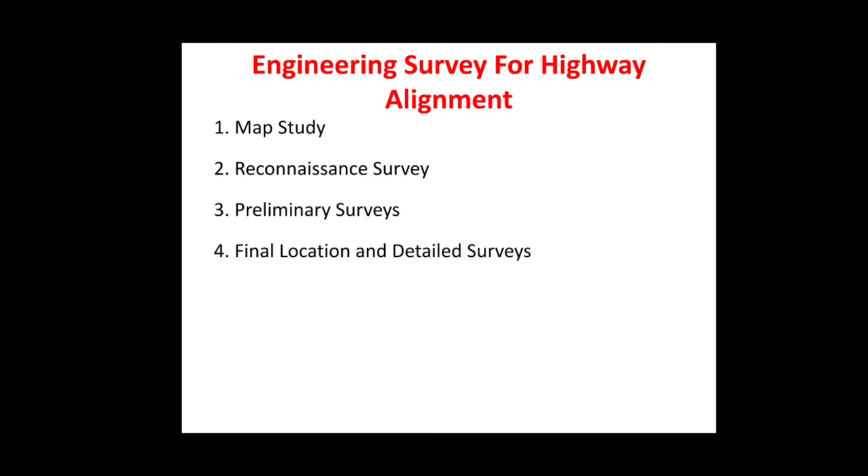In this session, we shall discuss the engineering surveys for the highway alignment. The various sorts of engineering surveys which have to be done for the fixation of the highway alignment are: first, the map study; second, the reconnaissance survey; third, the preliminary surveys; and lastly, the final location and detailed surveys.

Now, to start with the map study. If the topographic map of the area is available, it becomes possible to suggest the likely route for the road. In India, the topographic maps are available from the Survey of India department, and the main features like the river, hill, valleys are shown in these maps.

The careful study of such maps makes it possible to have an idea of the several possible alternate routes so that the further details of these maps can be studied and the probable alignment can be located on the map from the following details available on the map. That is, first, alignment avoiding the valley, ponds or lakes. Second, when the road has to cross a row of hills, possibility of crossing through a mountainous pass.

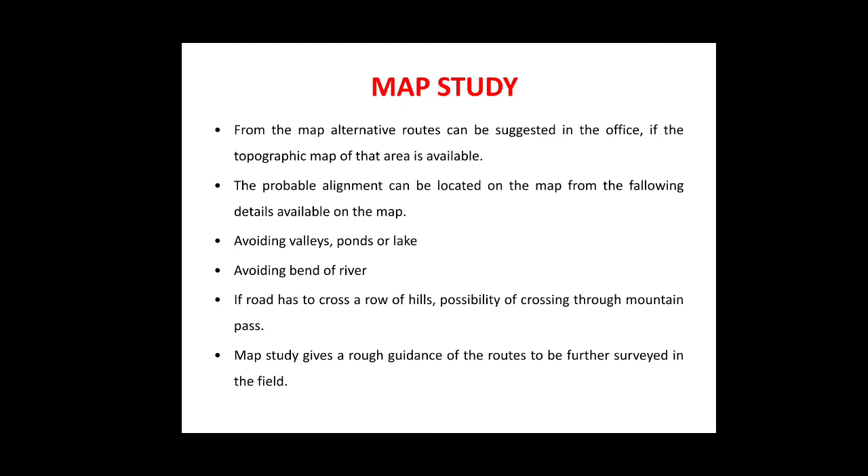Third, to avoid the bend of the river. Next, approximate location of the bridge site for crossing the rivers, which will help in order to avoid the bend of the river. And the map study gives a rough guidance of the routes to be further surveyed on the field.

Next is the reconnaissance survey. Now, the second stage of surveying for the highway location is the reconnaissance survey, in order to examine the general character of the area for deciding the most feasible routes for the detailed studies.

A field study party of experts may inspect a fairly broad stretch of land along the proposed alternative routes of the map on the field, and only a very few instruments like the Abney level, tangent clinometer, barometer, etc. are used by the reconnaissance party to collect the additional details rapidly. But it should be noted that they are not much more accurate, and all the relevant details not available in the map are collected and noted down.

Some of the details to be collected during the reconnaissance survey are as follows. First, the valley, pond, lakes, marshy land, ridges, hills, permanent structures, and other obstructions along the route which are not available on the map, they are noted down. And an approximate value of the gradient, length of the gradients, and radius of the curves of the alternate alignments are noted.

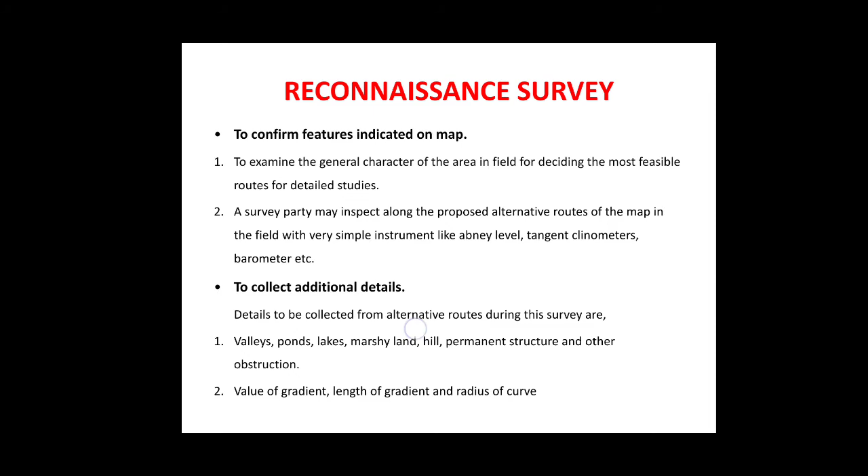When the road passes through a hilly or a mountainous terrain, additional data regarding the geological information, formation, type of rocks, the dip of the strata, seepage flow, etc., has to be observed so that it can help decide the stable and the unstable side of the hill for the highway alignment.

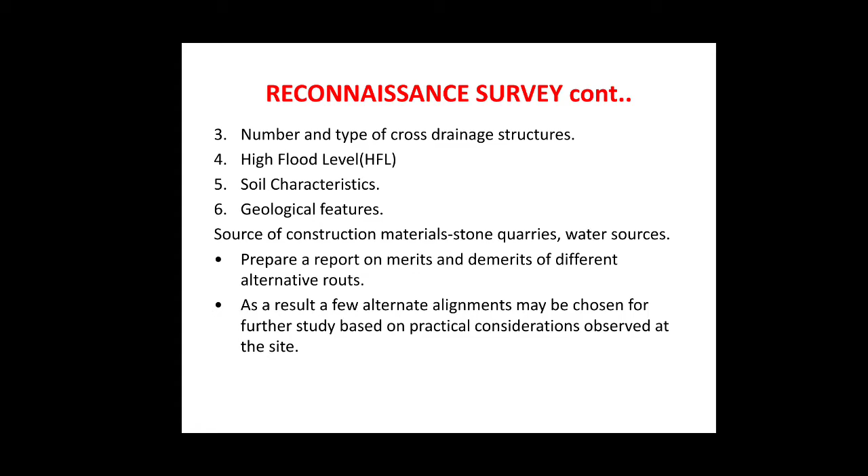As a result of these, a few alignments may be chosen for the further study based on the practical considerations observed on the site. Next is the preliminary survey. The main objectives of the preliminary surveys are to survey the various alternative alignments which are proposed after the reconnaissance and collect all the necessary physical information and details of the topography, the drainage, and the soil.

To compare the different proposals in view of the requirements of a good alignment, taking in consideration all the features, the local site conditions, the material availability. The comparison is being done and a feasible economical proposal is being selected.

Next is to estimate the quantity of the earthwork material and other construction aspects and to work out the cost of the alternative proposal. By this estimation of the quantity of the earthwork material and other construction aspects, an economical comparison can be done and the selection of an economical as well as a feasible proposal can be suggested.

The preliminary survey is carried out by the following methods. First, by the conventional approach. Second, the rapid approach. And third one, the modern techniques by use of the global positioning systems.

Now, in the conventional approach, it is a survey in which the survey party carries out the survey using the required field equipment. They take the measurements, collect the topographical data and other data, and they also carry out the soil surveys. Now, in case of the modern rapid approach, here an aerial survey is being undertaken, which is by the aerial photographs and by the photogrammetric methods and the photo interpretation techniques for obtaining the necessary topographic and other maps, including the details of the soil and geology.

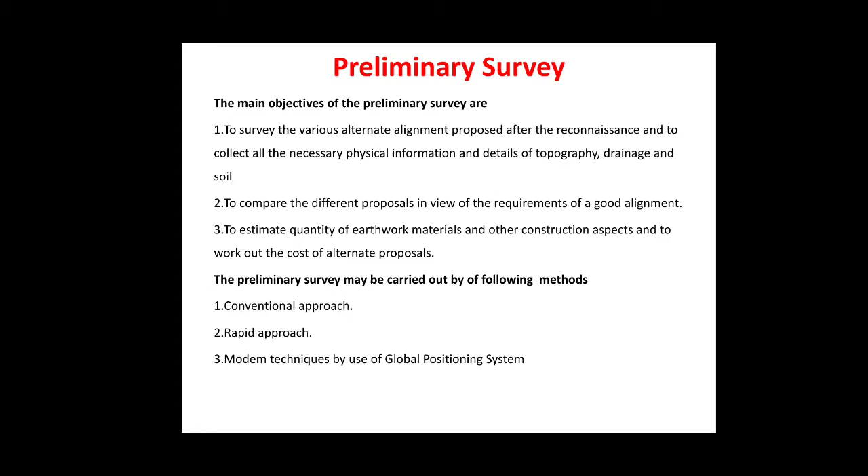The procedure for the conventional methods of the preliminary survey includes the following steps. First is the primary traverse. This is the first step in the preliminary survey, which is to establish the primary traverse following the line recommended in the reconnaissance. Now, for the alternative alignments, either secondary traverses or independent primary traverses might be necessary. As these traverses are open traverses, no adjustment for errors is possible. So, the angles should be very accurately measured by the theodolite, and the length of the center line should be measured by using very good and accurate chaining methods or by tacheometry or by some modern instruments.

Next is the topographical features. Once the center line is fixed for the preliminary survey, the topographical features are recorded, and all the geographical and other man-made features along the traverse for a certain width on either side are surveyed and plotted. The width to be surveyed is generally decided by the survey party, but the absolute minimum width is the land width of the proposed alignment of the highway.

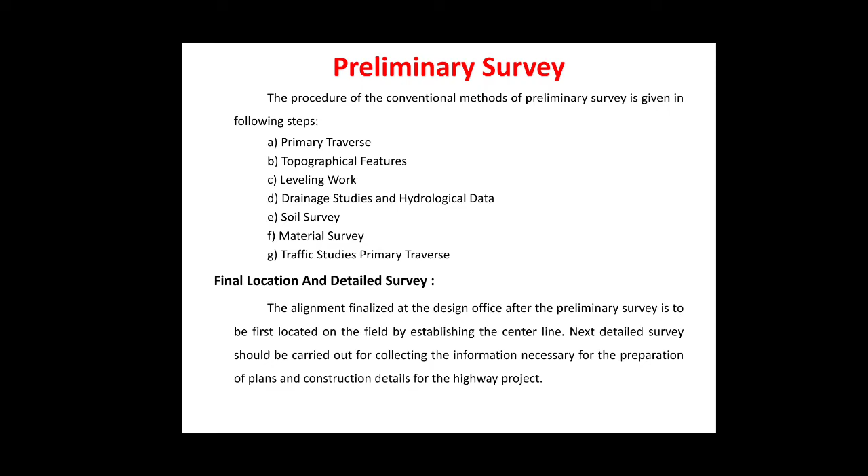The alignment that has been finalized in the design office after the preliminary survey is to be first located on the field by establishing the center line. That means the fixation of the center line from the plan on the site has to be done first.

Next, the location survey has to be done. And this is being done using the transit theodolite and by staking of the center line. The location of the center line should follow as closely as practicable the alignment finalized after the preliminary surveys.

The major and minor control points are established on the ground and center pegs are being driven, checking the geometric design requirements. Here, certain modifications in the final locations may be done on the field if found essential, and the center line stakes are driven at suitable intervals, say at 50 meters interval in the plain and rolling terrains and at 20 meters in the hilly terrain.

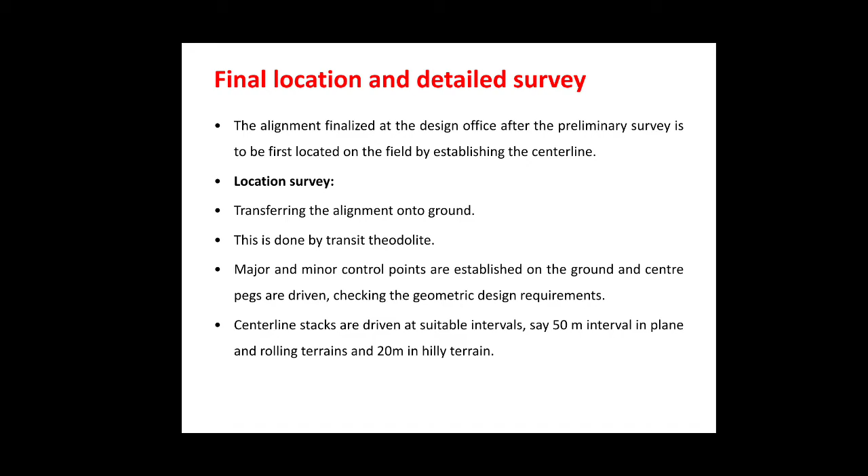Detailed survey. Now the temporary benchmarks are fixed at an interval of about 250 meters and at all drainage and underpass structures. The levels along the final center line should be taken at all the staked points. The leveling work is very important as the vertical alignment, earthwork calculation and drainage details are to be worked out from the level notes.

The cross section levels are taken out up to the desired width at an interval of 50 to 100 meters in the plain terrain and 50 to 75 meters in the rolling terrain, 50 meters in built up areas and 20 meters in hilly terrains. The cross section may be taken at a closer interval at horizontal curves and where there is an abrupt change in the cross slopes.

The detailed soil surveys should be carried out in order to investigate the strata beneath, and the CBR value of the soils along the alignment should be determined for design of the pavements.

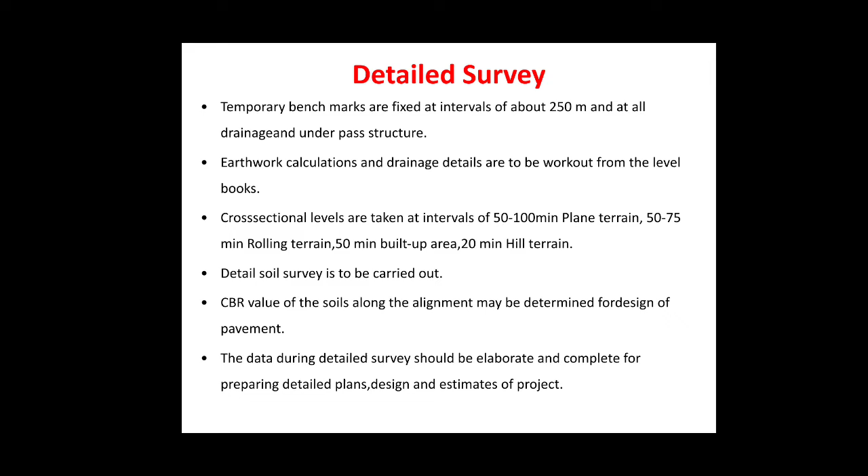The drawings and the report. The following drawings are usually prepared for the highway project. First is the key map, which shows the proposed and existing roads and important places to be connected. The size of the plan generally should not exceed 22 by 20 centimeters, and the scale of the map is chosen suitably depending upon the length of the road.

Next is the detailed plan, showing the ground plan with the alignment and boundaries, the contours at an interval of 1 to 2 meters in the plain country to a scale of 1 to 2400, and in closed country a scale of 1 to 1200 may be adopted for the detailed plans. The size of the drawings may be A2 size or 60 by 42 centimeters approximately.

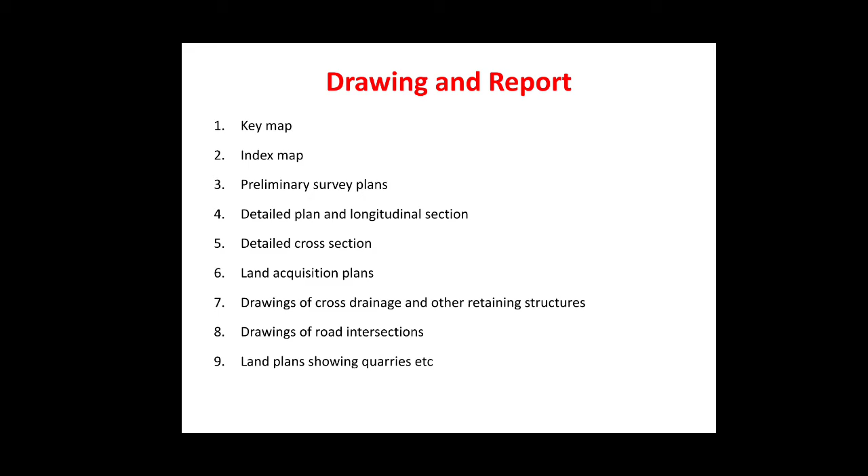The steps in the new project report. The new project report may be divided into the following stages. First is in regards with selection of the route, finalization of the highway alignment and geometric design details. Second is the collection of materials and testing of the subgrade soil and other construction materials, the mix design of pavement material and designing details of the pavement layers. Whereas the third stage is the construction stage, including the quality control.

In this, the steps followed are as follows. First, the map study. With the help of the available topographic maps of the area, the map study is being done. Second, the reconnaissance survey, which gives us the general idea of the topography and other features on the field. Identification of the soils, the survey of the construction materials and on the spot inspection of the site.

Next is the preliminary survey. The preliminary survey gives us the topographic details and soil survey along the alternate alignments, consideration of the geometric design and other requirements of the alignment, preparation of the plans and comparison of the alternate routes.

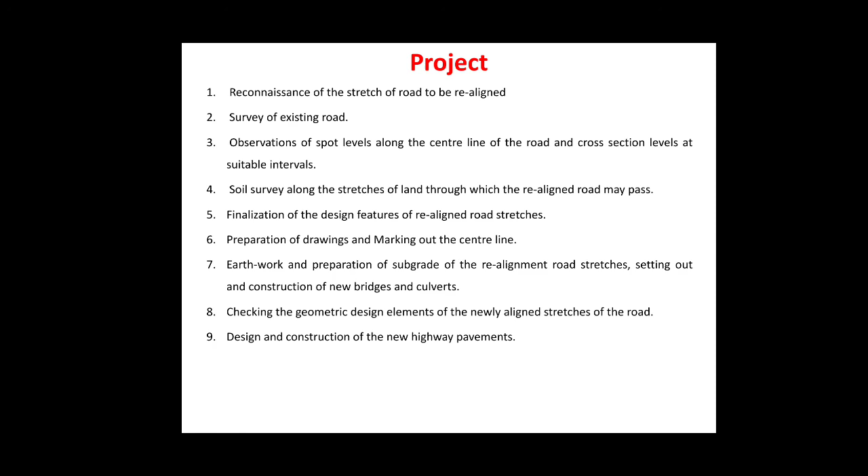Next is to prepare all the drawings and marking out the center line on the site. Earthwork and preparation of the subgrade for the realigned road stretches, setting out the construction of the new bridges and culverts is done, and then the checking of the geometric design elements of the newly aligned stretches of the road has to be done. Lastly, the design and construction of the new highway pavements is being made possible. With this, we shall stop.